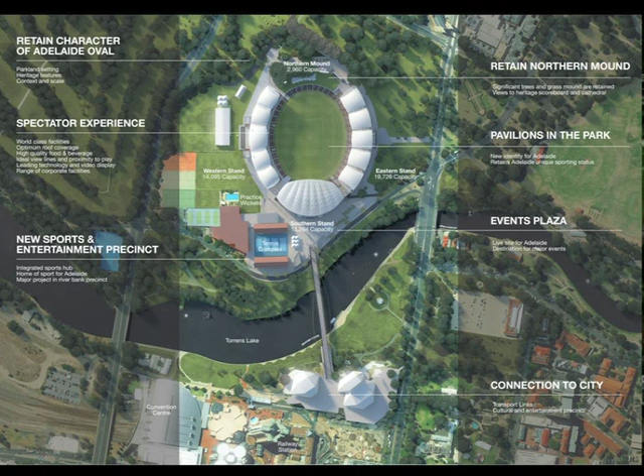What we have at the moment is the capacity to provide 2,100 cars within the parkland, much as we do currently. We're also looking at commercial car parking arrangements, with opportunities to potentially put 800 cars semi-depressed into the ground below some tennis courts, and the ability to provide potentially 900 odd cars on the other side of the river in this corner.

To the maths, how do we put 50,000 people around the ground? Well, as Mariano said, we've got 14,000 in the western stand, which is at the top of the screen here, over 3 levels.

On the south stand in the blue, we're creating about 13,500 seats in through there, and that's effectively the main infrastructure component of the project as well.

And on the eastern stand, we have just under 20,000 seats in a range that allows us to effectively start to work in concert with the scale and size of the western stand.

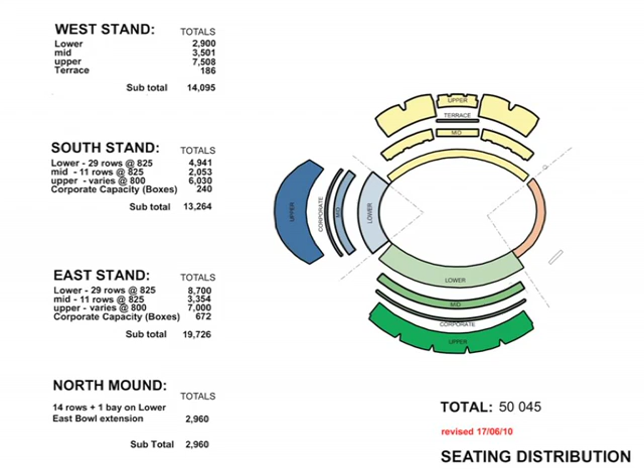And we get a couple of thousand against the north edge as part of the lower seating arrangements between the hill and the edge of the boundary fence.

We have a park entry on the east as people can come up Victor Richardson Drive and enter the ground on the axis at the east, or alternatively come in on the level above via a bridge over the river and over Memorial Drive onto the new 4,000 square metre plaza, and then break free into the western precinct or the eastern precinct.

As we move up through the ground, you can see we create a whole range of different sorts of spaces. It's no longer just a beer at the bar or a table of 10 at a corporate function. There's a whole series of opportunities created that can be changed and refitted over the life of the project. So stadium clubs, corporate lounge, the idea of a function room, dining room, and a city dining room in particular that looks over the plaza, over the river to the city and the festival - a really extraordinary space. I'll show you some images of the views through that later.

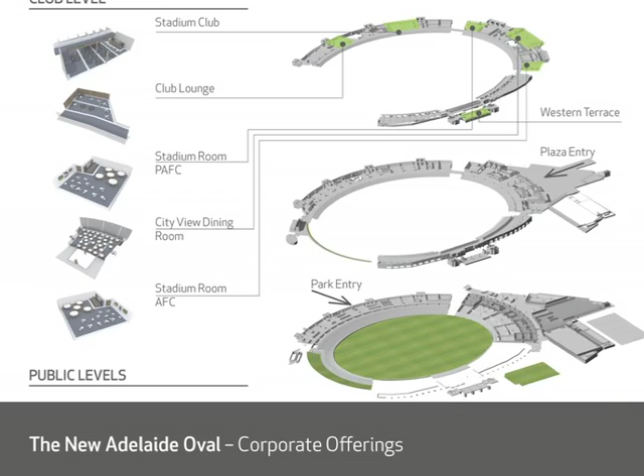As we continue to move through the ground, you can see we have a range of corporate suites that would be able to be fitted into the space, as well as terraces, roof terraces on the top that support both the food and beverage provision for the upper tier, but also provide fabulous terrace views back across the gardens and the city, and provide a barbecue terrace, if you like, to enable the celebrations and activities to continue.

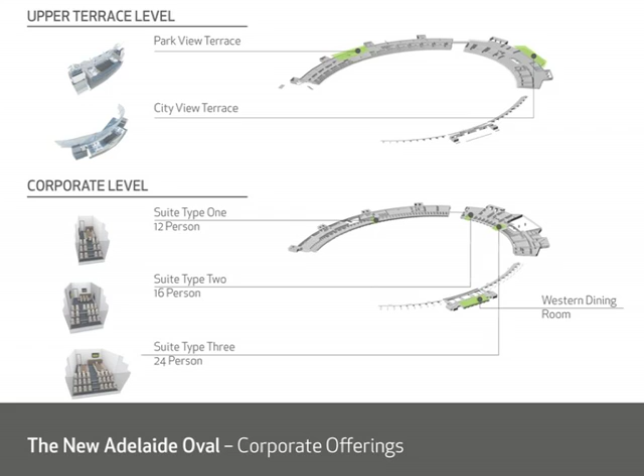In a programmatic sense, I'll run quickly through some areas of the southern component. I think as members of SACA, everyone's aware that putting on an event is not a case of just strapping on the pads and heading out to the centre. It's serious logistical operations, and we need to make sure we can continue to conduct operations in a world of rapidly changing needs and expectations.

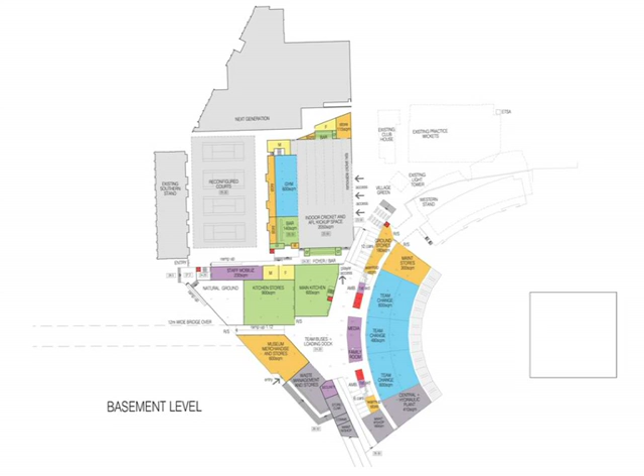Change rooms are on the south side of the ground, breaking out into a spectacular multi-purpose space that would form the indoor cricket nets, with capacity to use that space for multiple events over time. There's a relationship to the green space at the back of the western stand where the outdoor cricket nets are, and opportunities for connections into the memorial tennis arrangements.

As we move up from the ground level, we have an opportunity to put a mezzanine level in because of the volume of space - operational offices, a function room, and a mezzanine here, which I'll explain in a three-dimensional drawing shortly.

Finally, as we get onto the plaza, across the bridge from the city, there are cafes, food and beverage facilities, and the ability to have major screens that can host live events onto the plaza itself.

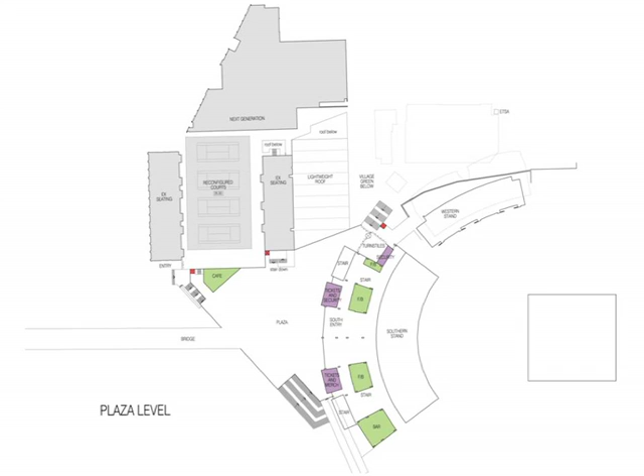Being on that plaza is partly an event in itself. On blockbuster event days, people may come to the plaza for an event in its own right. From here you can enter the ground on the south with a great view into the treasured turf directly ahead of you, or break free to the left into the western lawns, or east to deal with the eastern circulation if you haven't come in through the eastern stand itself.

As we start to look at that part of the project in 3 dimensions, you can really see this has got the capacity to be the home of cricket in South Australia. It's an integrated arrangement where we have major public spaces, an indoor cricket training facility, and relationships back with the outdoor cricket wickets.

This is significantly bigger than the existing indoor training area, so you can see the capacity for the Adelaide Oval to continue to support not just elite cricket, but the development of cricket for future generations as well. It's a highly used facility - school children and young budding cricketers are taken through this facility all year round, and it really needs to work very hard for them.

Part of the arrangements here also give potential access to the talent, something you can't get at home. From here, you get a view from a mezzanine into the warm-up rooms of either the Crows or Port, as the case may be, and the capacity to come through into a hospitality area that overlooks in a similar way to what could be imagined at the Crow Shed in a particular fit-out mode. Again, only during those particular events - at other times it reverts back into its cricket training facility.

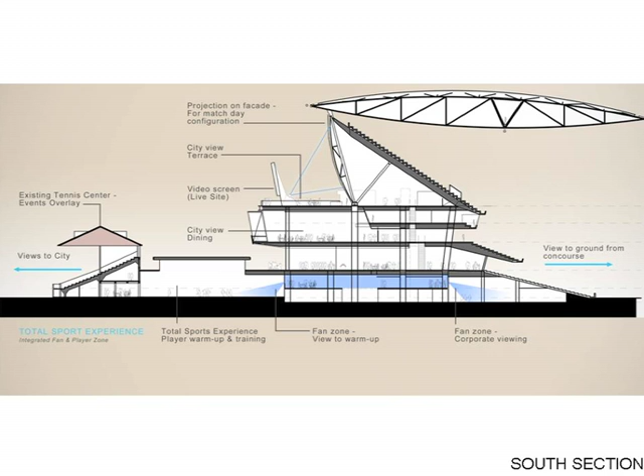We have the main entrance at plaza level through there, and the capacity even under the plaza to see into either the training facility or the warm-up spaces, with a terrific view back through to the ground. So quite unprecedented in what it offers as an opportunity back to the city.